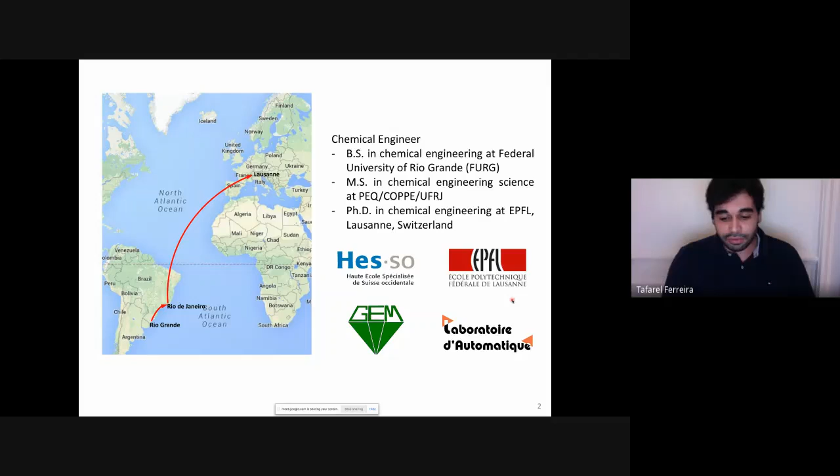EPFL is indeed a very nice place to work and do research.

Moving on directly to the presentation, I'm going to speak now a little bit about RTO. I'm going to try to explain to you what it is and how we do it.

So real-time optimization is a family of techniques where we use measurements in order to enhance the performance of the plant. By plant, I mean any kind of system that we aim at optimizing or improving the performance. Usually the plants are under disturbances, for example when the system has any kind of degradation, so the operating point changes over time, or because of noise, and also in presence of plant-model mismatch, which is basically the difference between the actual measurement and the model of the system.

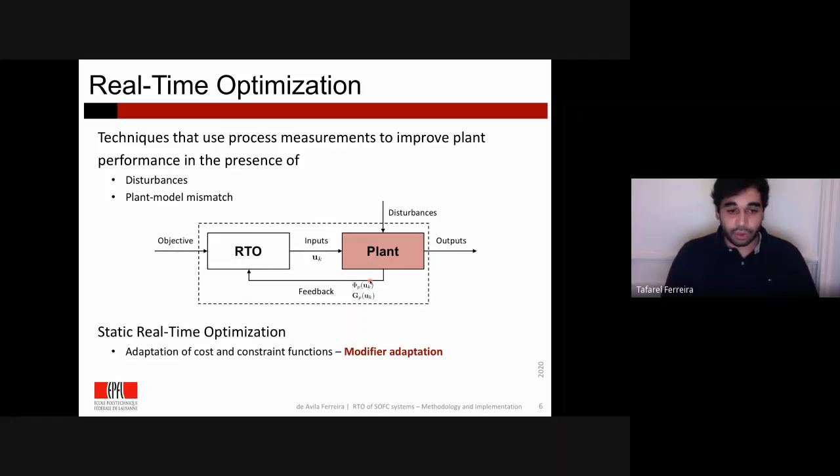So with these measurements, or with these entities computed, we feed back into the RTO block, and then we solve this problem iteratively until convergence. One of the most recently used RTO techniques is modifier adaptation, which adapts or modifies the cost and constraint functions. So how does it work? How does RTO really work?

So basically, as I said, we have the plant that we can write mathematically as the optimization problem, as you can see in this red block. And we have a model, which is an uncertain model, which doesn't really represent perfectly how the plant actually is. So just imagine if you had a perfect model, which we don't have, but if you did, and you were able to solve it, the solution of this optimization problem would be definitely different from this other optimization problem of the uncertain model.

It's important to mention as well that if we had a very good model, we wouldn't be able to use it in the RTO scheme. Why? Because usually good models tend to be slow and very computationally expensive. Therefore, we tend to use the best model that is available, the best model that is suitable for optimization, but that's not the focus.

So just imagine if you solve the optimization of the model, the gray block, and then input it into the plant, it would most probably lead to a suboptimal condition. It wouldn't be the optimal of the plant, because it would actually only be the optimal of the model. And it could even be worse, it could lead to an infeasible solution, which could be quite dangerous.

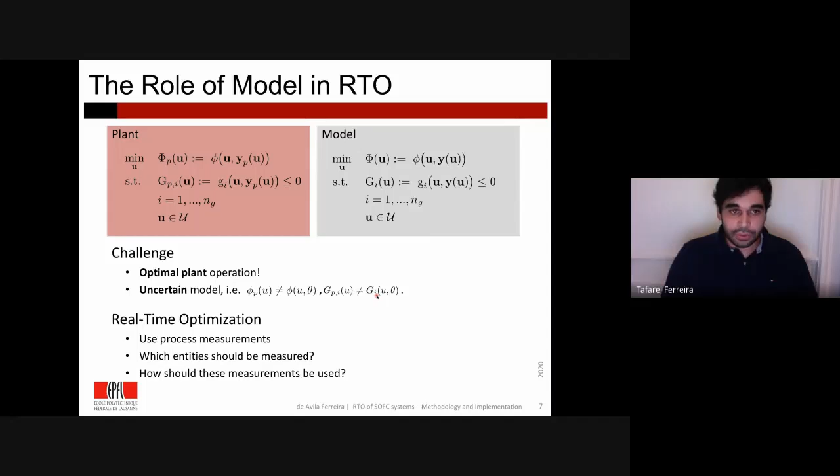So the challenge, or what we aim at, is reaching optimal operation of the plant using this uncertain model. But the question we raise here is how we do that, and the answer is by using the process measurements. But which measurements should we use, and how should we use these measurements?

One of the possible answers to these questions is the use of a modifier adaptation technique called constraint adaptation, where we use bias corrections of the constraint functions. So here we have a nice graphical representation. Here you can see in black the constraint of the model, and the constraint of the plant is in red.

Just notice that the red curve here actually doesn't exist. We are not able to have this red curve perfectly continuous as a continuous function, because we don't have a perfect representation of the plant. So what we do actually is shift this model constraint into where the plant is, by adding this bias term that here is expressed by epsilon g.

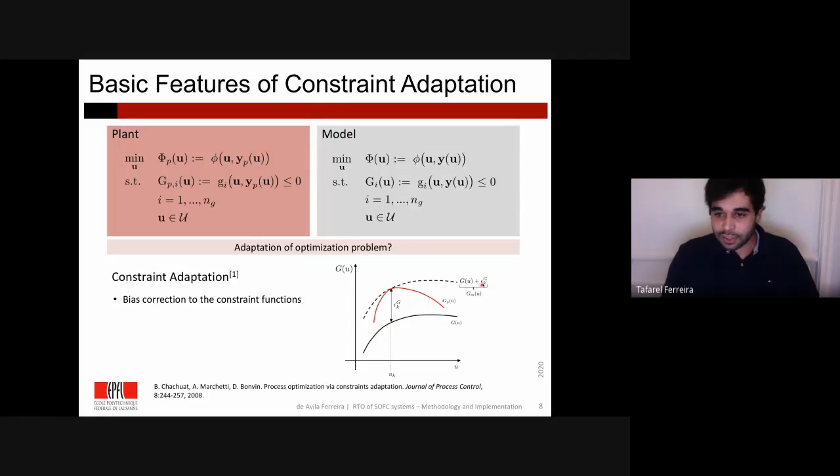So how does it work, basically? We solve this optimization problem here, where we add these bias terms to H and G. H represents the equality constraints, and G represents the inequality constraints, and these epsilons are computed by the difference between the plant measurements for both equality and inequality constraints, compared for the same operating point for the model.

Once you solve this problem, you will obtain the optimal solution, the optimal input that you may filter or not, and then you apply it to the plant. You wait until the plant reaches steady state, and you compare it with the counterparts of the model, or in other words, for the equality and inequality constraints of the model evaluated with the same inputs, the optimal inputs that came from the optimization problem.

Once we have this, we compare them, we subtract the model entities from the plant entities, and we input into the optimization block and solve this scheme until convergence. One advantage of using this is that if the optimum is determined by active constraints, which I will show you for the case we want to apply, it works very well, and it can be proven that we reach the KKT conditions of the plant.

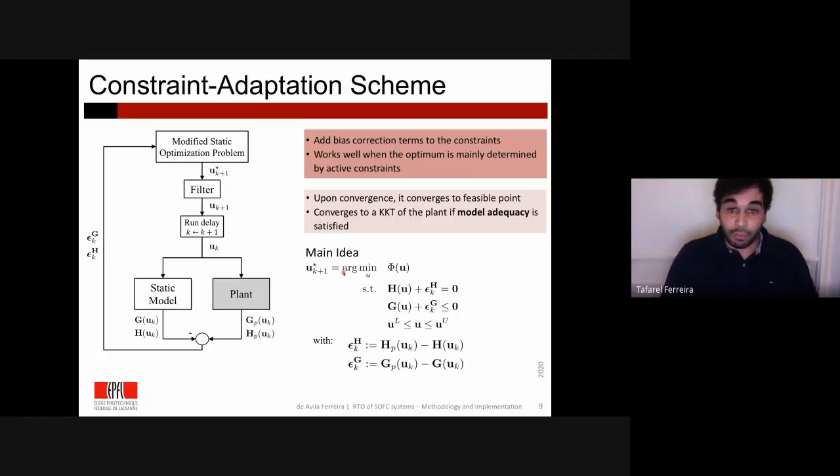For that, we have some model adequacies that I'm going to show in the next slide. So the model adequacy for the model basically says that we have two kinds of constraints: the constraints that are active and the constraints that are not active when evaluated at the optimum of the plant should be in a feasible region.

And also this other equation here basically says that the gradient of the plant should be, of course, in an opposite direction, equal to the linear combination of the gradients of the constraints, as you can see here graphically.

In other words, explained more simply, it just means that the optimum of the plant, the real optimum of the plant, should be in this quadrant. That's actually what this equation says. So if it's in this quadrant, behind the intersection of the active constraints, then it's guaranteed that this model is adequate, and therefore we are going to reach the optimal solution and satisfy the KKT conditions for the plant.

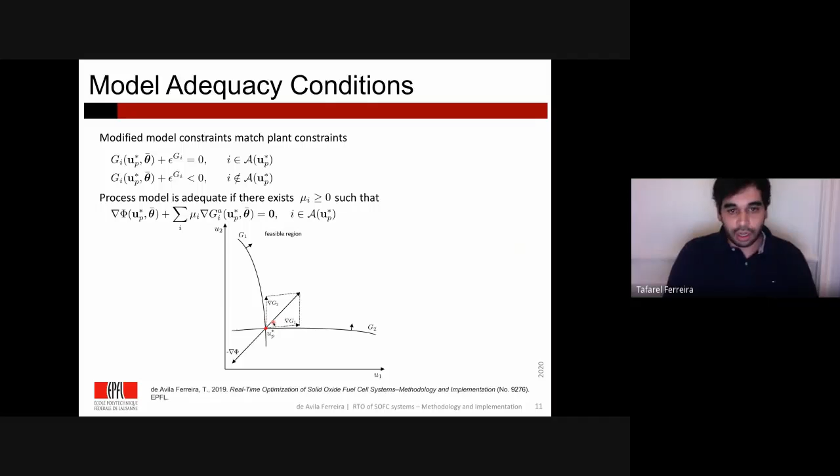But one of the problems of this scheme is that, as I said previously, we have to wait for the plant to reach steady state. This is a problem mainly for solid oxide fuel cell systems, or SOFC systems, because it may take one to two hours to reach a steady state. So just imagine that every time you need to apply a set of inputs, you have to wait until it reaches steady state, and then you change, and then you change again.

And it can be even worse. It could be that you apply the set of inputs, you go to an infeasible region, you have to wait until it reaches steady state, and then it can be too late, and then you have to apply a new input in order to go out of this infeasible region.

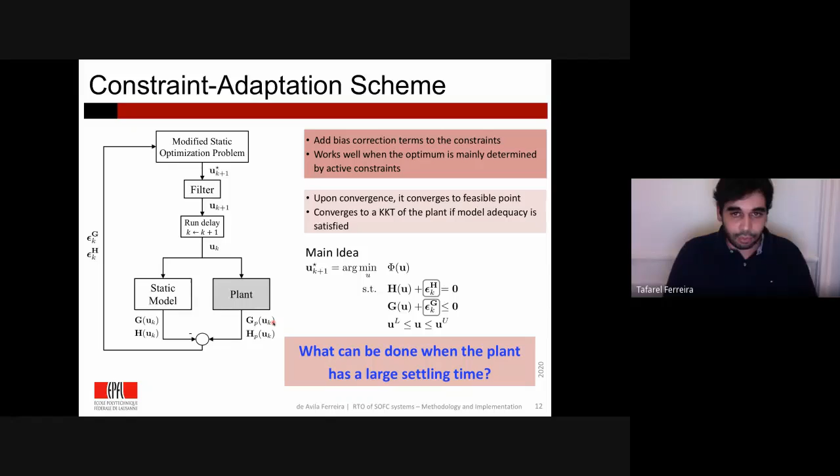So the question here is, what can we do in the case when the plant has a very large settling time? One possible answer is fast real-time optimization. That is one of the techniques we proposed during my PhD, where instead of using a steady state model and steady state measurements, we use transient measurements of the plant. So we perform each iteration without waiting for the plant to reach steady state, and we use a dynamic model.

However, what we use in the optimization block is still a static optimization. And this is the catch, because a static optimization is much simpler to solve than a dynamic one. A static optimization problem is much simpler to solve than a dynamic optimization problem.

So here, basically, the only difference is we still have these epsilon terms for the equality and inequality constraints, but here we compare the transient measurements of the plant with the transient counterpart of the model. This is done by using a dynamic model that we have.

By dynamic model, it basically means that we have the time derivatives representing the plant, but we don't have a model that is discretized and really represents the system spatially—that's important to mention. It's a simpler model, and the focus here is to use the measurement to ensure that the plant is going to reach the optimum, not to focus on the modeling part.

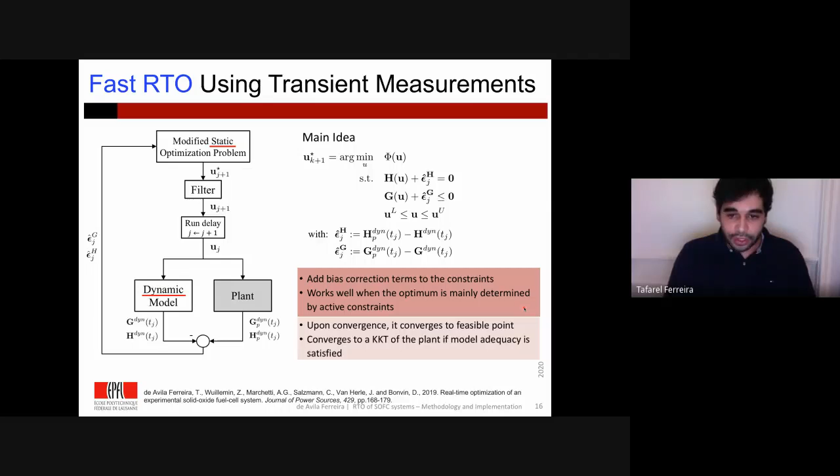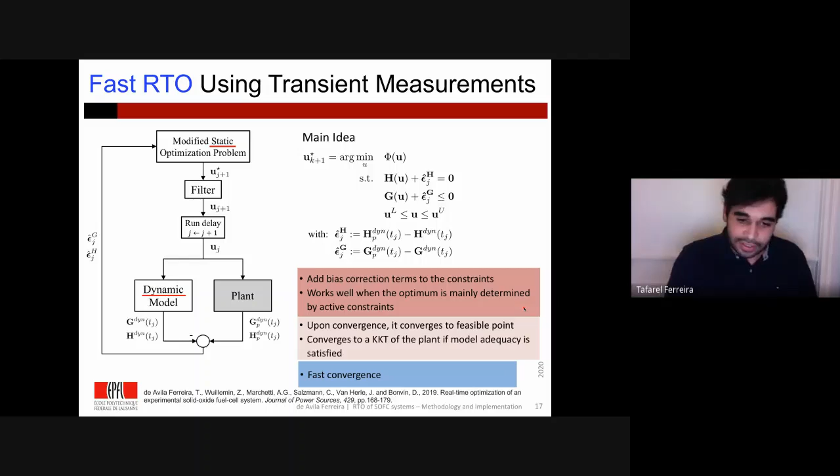So it possesses the same kind of advantages, as I said, like we just use bias corrections. If the optimum is determined by active constraints, it works very well. And upon convergence, it guarantees that we reach a feasible point. We also have the same KKT conditions if the model adequacy is satisfied. However, we have one additional feature, which is fast convergence, compared to the previous method where we have to wait for the plant to reach steady state.

So here, I would like to show you the SOFC system that we are going to use to optimize.

So the SOFC system consists of the SOFC stack, which is the heart of this system, an afterburner that is used to burn the fuel that is not used inside of the stack, and a pre-reformer.

Okay, maybe I should go the other way around. We have the fuel, steam, and air. With these three things, we input into the pre-reformer. In the pre-reformer, we convert the fuel, which is the methane in this case, into hydrogen, because of the reaction with the steam here inside of the pre-reformer.

So when we have this combination of a gas that's called syngas, which is mostly hydrogen, we input into the stack, and then here the hydrogen in the anode reacts with the air in the cathode, in the membrane that's inside of this device. When this reaction takes place, we generate electricity.

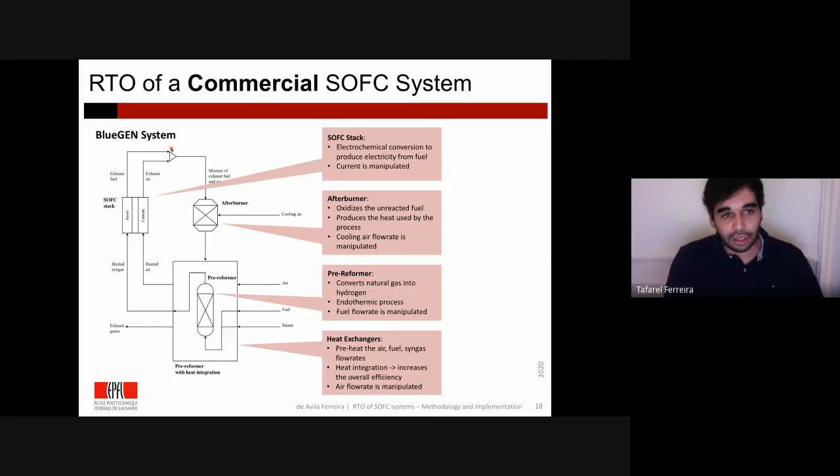It's a P&ID of the BlueGEN system, a commercial system produced by Solid Power, which is an Italian company that sells these devices.

Here, more specifically for the fuel cell stack, we can see how the thing works. So basically, the fuel enters by one chamber and the air enters into the other chamber. The oxygen goes through the membrane where the reaction takes place. When this reaction takes place, electrons are liberated, and here we have a resistor.

This resistor - we can control the size of the resistor, therefore the resistance. In other words, we are controlling the electric current. By controlling the electric current, you are controlling the conversion of this reaction, which is quite interesting. So when you control the conversion of this reaction, we are actually controlling the power that we can deliver.

So in some cases, as these devices are produced aimed for small business and houses, for example, to produce electricity, we can adjust this resistor or the electrical current in order to produce the energy that's required for the house. So we have sometimes a peak of energy where we need more, and also periods where we don't need much energy.

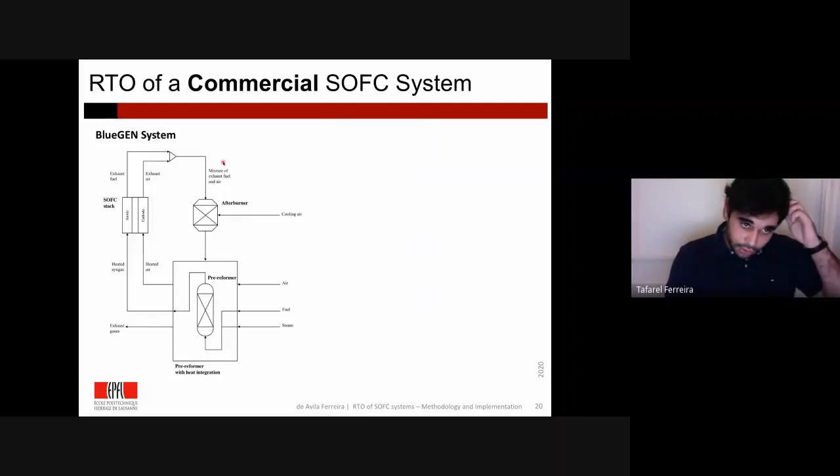So as I said, this is a system produced by Solid Power, but actually they don't use any kind of advanced controller. They only use PID. So we had to use RTO to really optimize their system.

And we had 4 inputs that we used to optimize, which are the current, the fuel flow rate, the air flow rate, and the cooling air flow rate, that you can see here in the P&ID in red.

And in blue are the measurements, the only measurements that we have to use in the RTO scheme in order to control it, which are the outlet temperature of the cathode, the inlet cathode temperature, the burner temperature, and also the cell voltage.

And then Solid Power gave us some operational constraints for the cell voltage, for the fuel utilization, which is how much the fuel is being used by the SOFC stack, the air excess ratio, which is a ratio between the stoichiometric air that we need and the air that we input into the system, the temperatures that I just mentioned, and also the upper and lower bounds for the inputs, as you can see here.

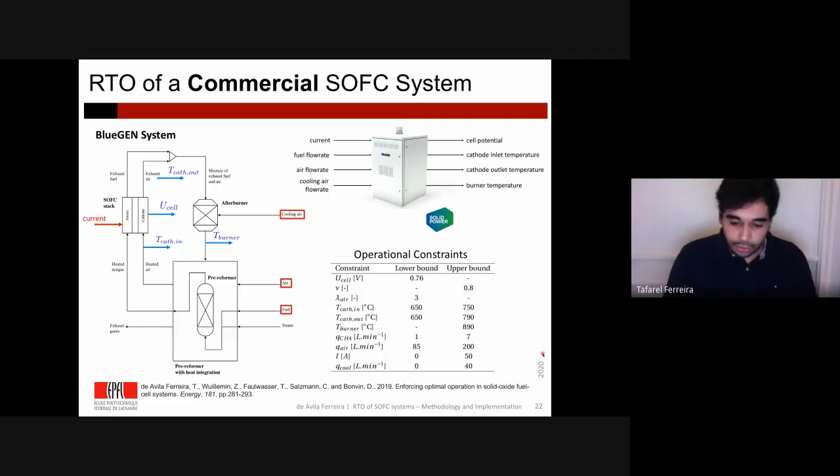So once we have this, we formulated the optimization problem where we aimed at maximizing the efficiency, the electrical efficiency, as you can see here.

And then we have these other terms for the cooling air and the air that we input into the system, that are there only to ensure that we are going to use the minimum amount of air that's allowed.

We solve this optimization problem with these operational constraints, and we have one additional constraint, which is an equality constraint, that's on the electrical power.

Basically, this is just set by the user a priori before we start the optimization routine. And then the objective is to maximize this efficiency for this particular electrical power that is set while respecting all these operational constraints.

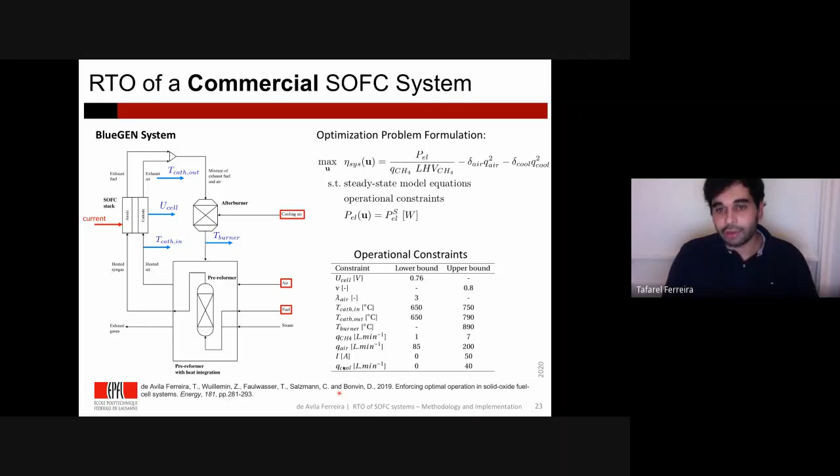Here I'm going to show you two experiments. One we call slow RTO, that's the first part that I presented, when we wait for the steady state to take measurements. Here we wait 90 minutes, which is basically the RTO period. Then we have the fast RTO, where we wait only 5 minutes, meaning the system is always in transient.

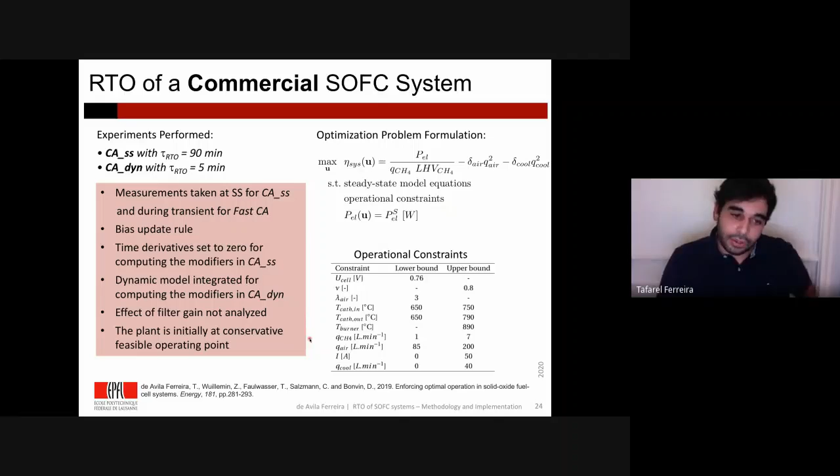We are going to do the bias rule, because it's inherent to the constraint adaptation. For the steady state case, we set the time derivatives used to compute the epsilons to 0, and for that we integrate them to solve the dynamic model. We are not going to evaluate the filter gain; instead we set it to a fixed value, and we start the experiments from a conservative point.

We set this parameter, KF, to 0.4, meaning we move 40% of the way toward the result that the optimization problem gives, with respect to where the system currently is operating. Then, as I said, we have these two RTO periods, and we solve this optimization block here.

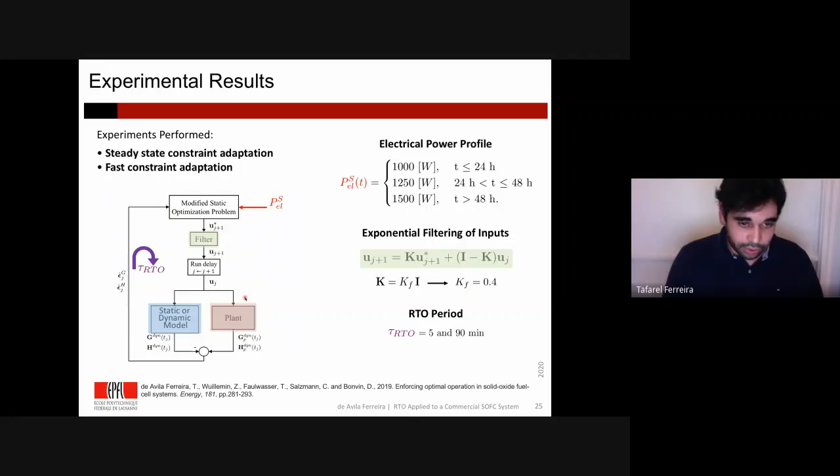So first, aiming at 1 kilowatt, we start from the very conservative point that solid power gave us, which is 1 kilowatt at 55% efficiency, then we apply RTO and see what happens. Here is the first set of results.

We also see that it takes up to 6 hours to reach the electrical power when we change the set point, and the reason is because of the filter we chose. We wanted to be conservative, to ensure that we wouldn't break the system or violate any constraints. But this is just a matter of tuning the parameters.

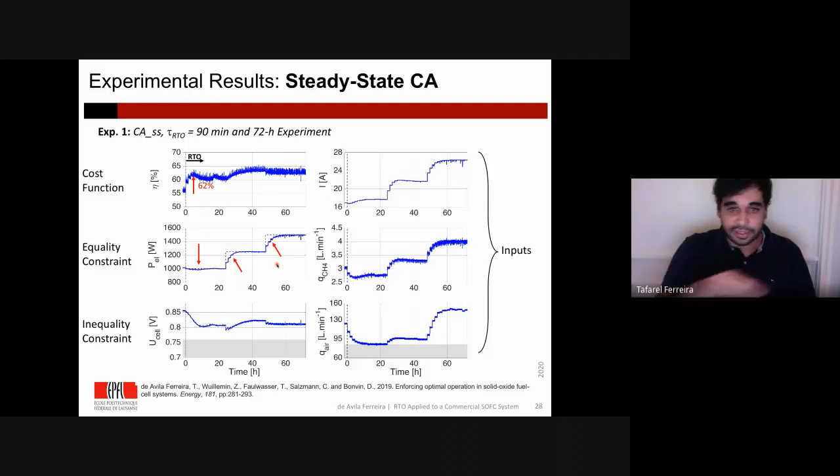We can see that for the first part of the experiment, when the electrical power is at 1 kilowatt, the air flow rate variable is at its lower bound, so it's considered one active constraint. This equality constraint is also considered an active constraint. So we have two, plus the cooling air flow rate that is also at its lower bound. Additionally, we have the inlet cathode temperature at its lower bound too. So we always have constraints active.

So for this specific SOFC system, we see that we have 4 constraints active, and we have 4 degrees of freedom, 4 optimization variables. So we can say that this constraint adaptation technique is quite suitable for this kind of system.

We also see that for this BlueGEN system, as it's called, it takes from 16 to 20 hours to actually settle to the steady state. This is one thing we should say: this is not suitable for industry. They are not interested in an approach that takes so long to reach a steady state, which is the optimum of the system.

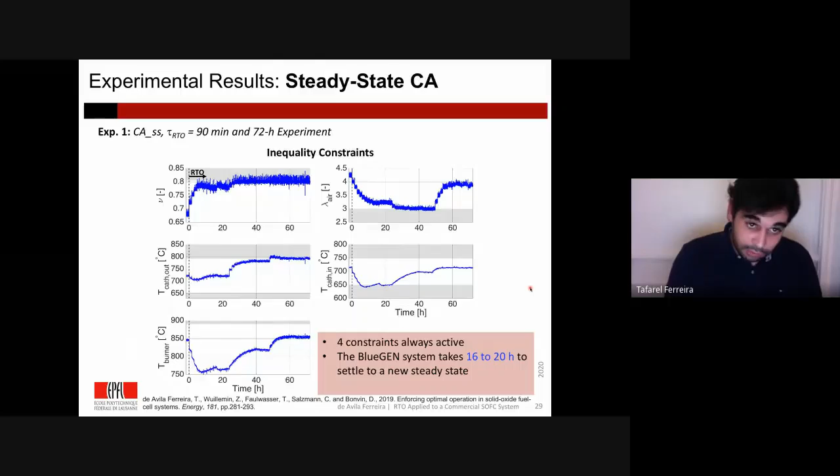So we applied the fast RTO, where the RTO period is 5 minutes. Here, we didn't see the need to do a 72 hour experiment because it was much faster.

So we reduced it to 6 hours. We apply the same filter equal to 0.4, and we have practically the same profile. The only difference is that we change the electrical power every 2 hours. Repeating, we use a dynamic model and transient measurement, and we start from the same conservative point at 1 kilowatt and 55% efficiency.

If we had chosen, for example, a filter value equal to 0.6 or 0.8, it would be much easier and much faster to reach this equality constraint.

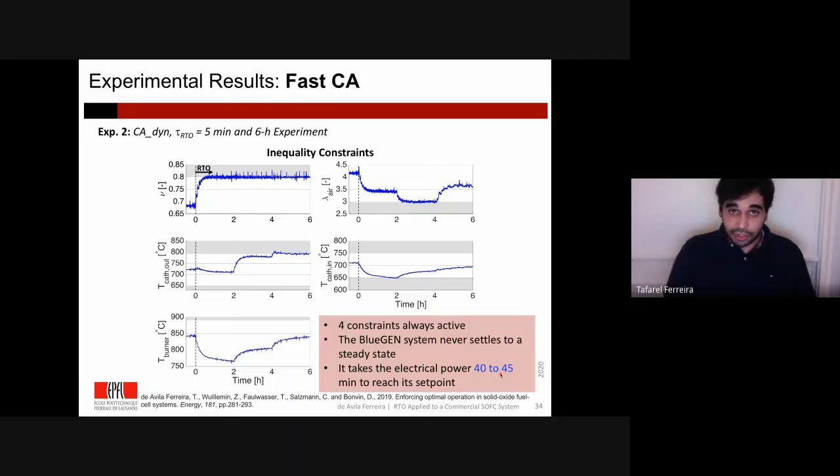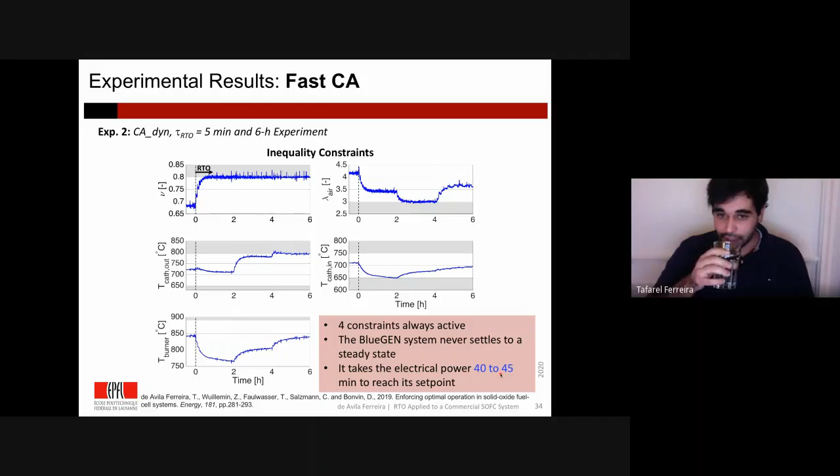Interesting enough, we have again 4 constraints active. The one very interesting thing is that although we use a static optimization block to solve this, the system never actually settles to a steady state. As you can see here for the temperature profiles, they are always moving, but instead of taking such long time as 16-20 hours to reach steady state, with this proposed method we take 40 to 45 minutes to reach the set point of the electrical power, which is a significant advance for these kinds of approaches for solid oxide fuel cells.

Okay, so now I'm going to show another thing that I did when I was doing my postdoc at the GEM group of energy materials, where we used basically a machine learning approach. We use Gaussian process and incorporated it in the RTO block, combined with RTO, in order to solve the optimization and find optimal operation for SOFC systems.

So here, instead of the BlueGen, we have a smaller system. Instead of producing 1 to 1.5 kilowatts, it produces only 100 to 130 watts, so it's a much smaller system. Before we had the burner that helped keep the temperature up; here we don't have the burner. Here we have only electrical heaters that help reach the desired temperature, as well as the pre-reformer, in order for the reactions that enable the conversion of methane into hydrogen to take place.

And we have as well the fuel cell stack here. So in blue, you see the inputs or the optimization variables, the ones that we use to manipulate the system. And in red, we have the measurements: the temperature of the anode, the temperature of the cathode that goes out of the stack, the cell voltage, and the temperature of the air after the electrical heater.

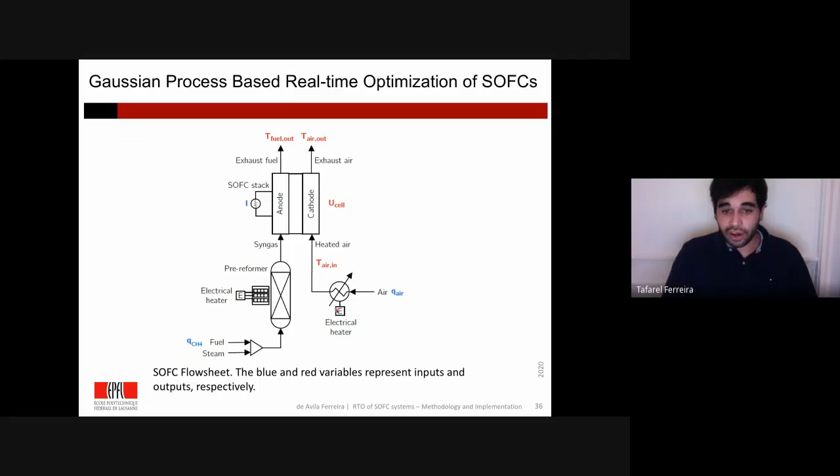So basically, we have a very similar optimization problem with different values of upper and lower bound, because it's a much smaller system, and we have one less optimization variable. Here it's formulated exactly the same way as before: you want to maximize the efficiency, reduce the amount of air that you use. We have an equality constraint, upper and lower bounds on the inputs, and then the other operating constraints on temperature, cell voltage, fuel utilization, and air excess ratio.

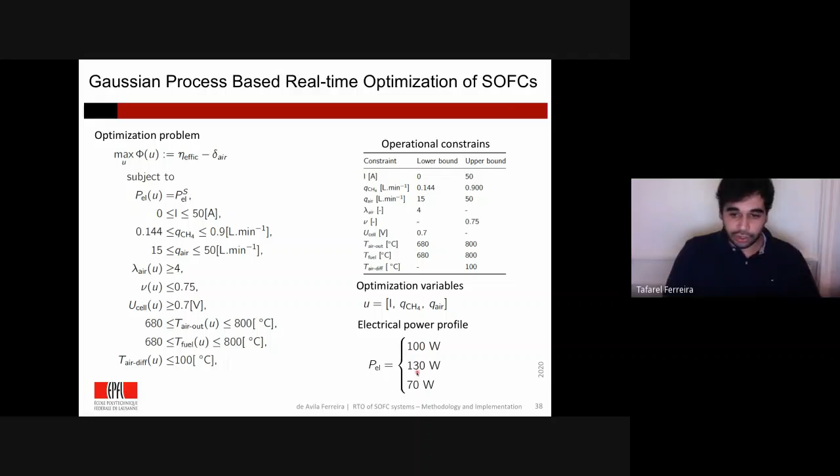Okay, here we also change the power in order to just check the performance of this approach. So we go from 100 to 130 and 70 watts because the system is much smaller.

Okay, so before I go into how we formulated this Gaussian process based RTO, I think I should just give a few words about modifier adaptation. Before, I presented constraint adaptation, which is a simpler version of modifier adaptation.

So here, basically, what we do is we have some terms which are the zeroth and first order terms of a Taylor series expansion for the objective function and constraint function. And then we just have to compute these lambda terms for the objective and constraint functions, and these epsilon terms that are represented here below.

So basically these terms are the difference between the plant constraints and the constraints of the model. And also we have the derivative with respect to the inputs. And then we just subtract the plant entities from the model entities for both the constraint and objective function.

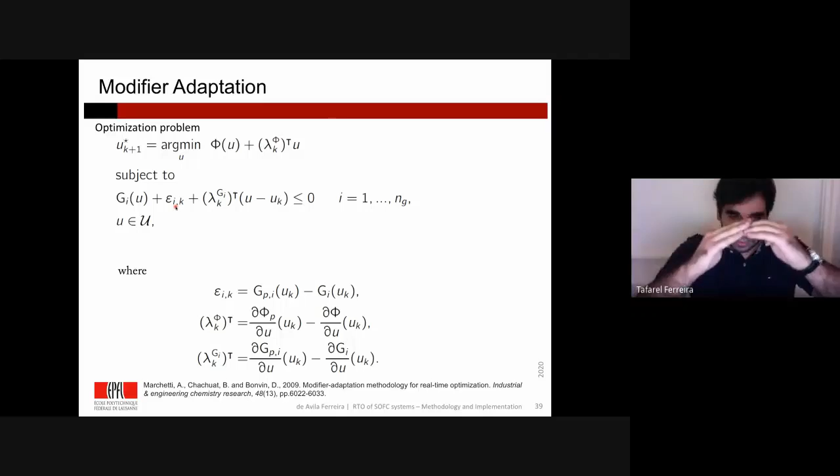So when you do that, basically what you do is you shift the function. As you can see here, you shift the model function to where the plant is, where the measurement is. This is evaluated at the current point. And then you also change the slope of the function.

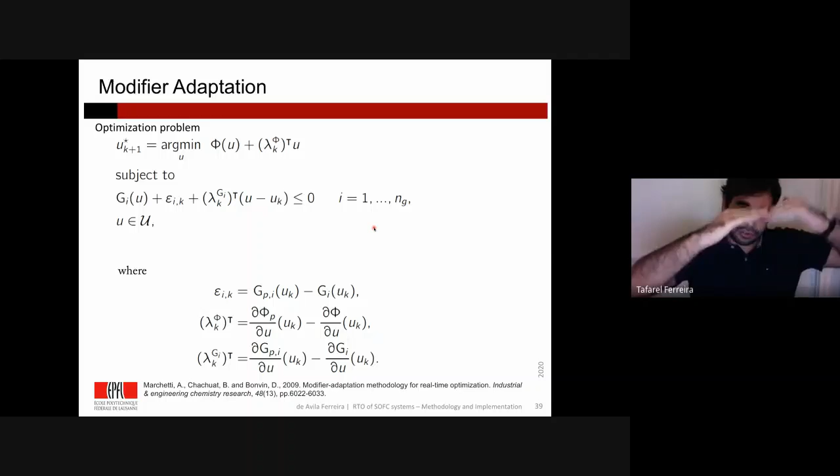So what we do basically is evaluate the derivative of the plant at the current point, and then we correct this in the model. We shift the model and correct the slope of this function, so that the model at this specific point gets more similar to the plant.

However, one major drawback of this technique is the fact that we have to compute these gradients. So how do we compute these gradients of the plant? We usually do finite differences. Can you imagine doing finite differences for a SOFC system where you have to wait 90 minutes to reach steady state? What does it mean?

It means that if you have 4 inputs, you perturb one input, you wait 90 minutes to reach the steady state, then you perturb the second, 90 minutes more, the third and the fourth, always waiting 90 minutes to reach the steady state. And after that, you are able to compute only one term, only one term, which is the gradient of the plant.

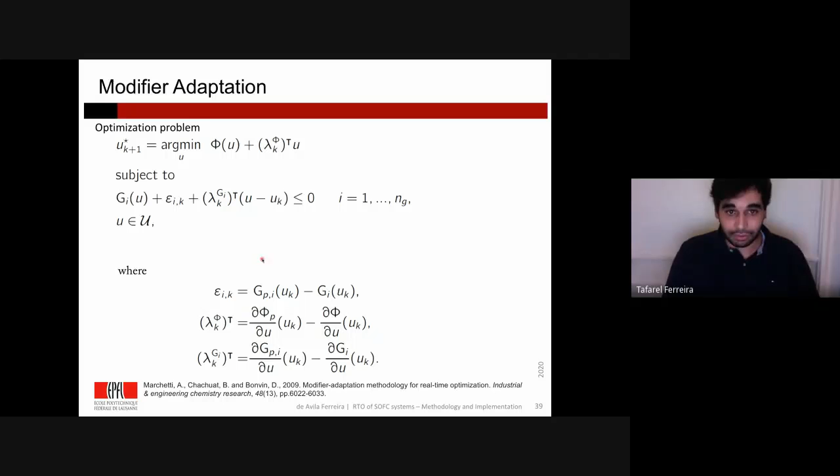And then you do this correction, and then you go to the next iteration and perform exactly the same thing again. So due to this reason, we proposed a GP-based approach, a machine learning approach, where you use Gaussian processes to do regression.

So by doing that, we don't need to do the finite differences, the perturbations in the plant, and then we obtain much more information about the surrounding of the operating point where we actually are. In other words, you obtain more information and you are faster. So that's a quite good advantage of this approach that we proposed.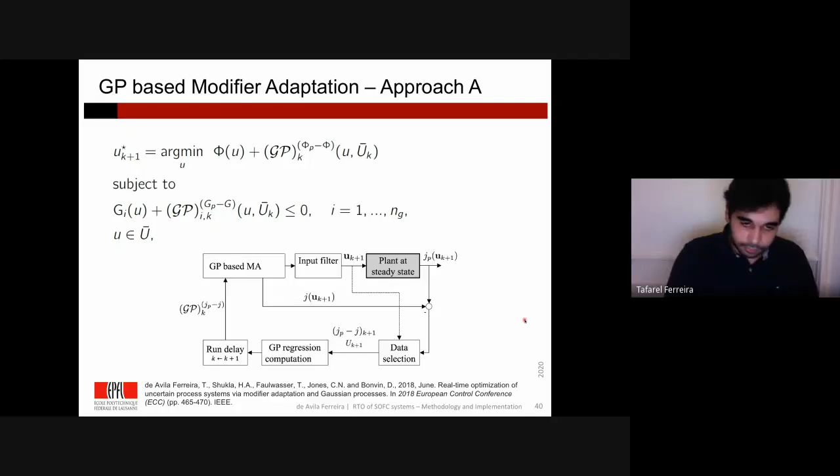Another approach, which I call approach B, is that we compute the GP of these epsilons and also lambda, using only the available measurements that we have.

We don't have to actually perturb the plant, we perturb the GP, but this is done offline because you only have the measurements, and in the end you end up with a GP model. Then once we compute this epsilon, we introduce it here in the modifier adaptation approach.

So this is another way of computing these modifier terms, and we have another GP approach to show and compare the differences.

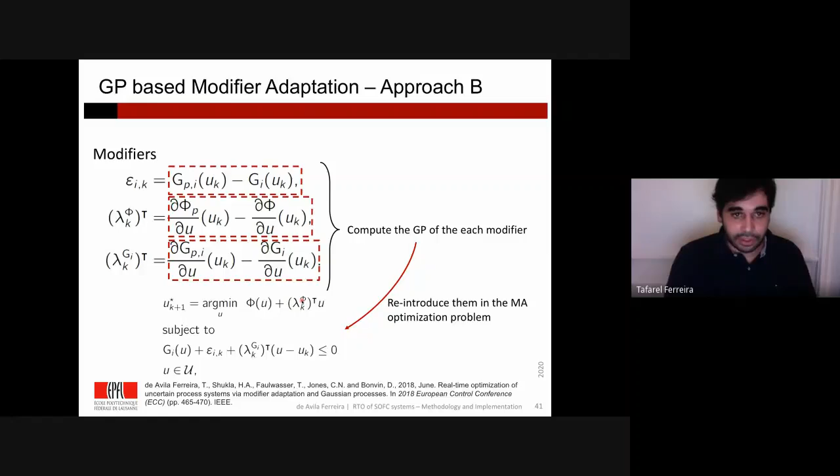For this specific system, we used 12 data points. Here are basically the inputs, and here are the outputs, or the variables that we compute based on the outputs.

Here we have the last point, which is the optimum of the model applied to the plant at 100 watts. You can see clearly that when you apply these 100 watts, that optimum of the model, to the plant, we don't obtain the power that we wanted. So here we can see clearly the mismatch that we have.

Additionally, we computed the plant model mismatch for the measurements, for variables like cell voltage and temperatures. You can see that for the cell voltage, the highest value is 0.13, which is the difference between plant and model, representing up to 20% with respect to its nominal value of 0.7. In other words, we have a significant plant model mismatch.

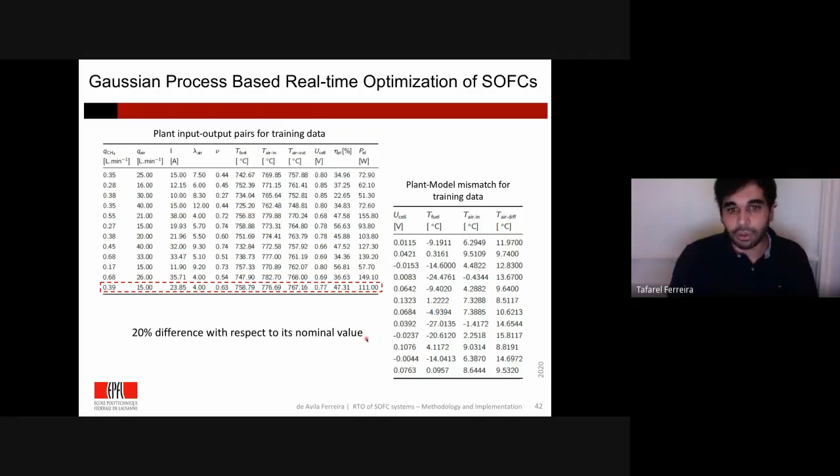I think I'm a little bit short on time, so here are the other variables. As you can see, the cell voltage is quite noisy, but even so, we don't have violation of constraints. These are just because of the noise.

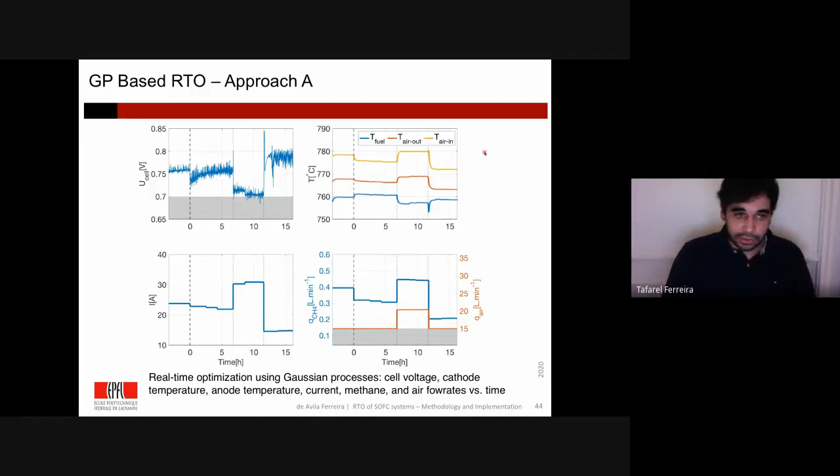Here is the profile of the temperature, and here are the inputs, as you can see—in other words, the variables that were changed in order to obtain the performance that you saw on these slides. For the second approach, we can see that...

We only have a change from two powers. We go from 100 to 70, and the reason is basically because we did one experiment very far apart from the other, and when we performed the second experiment, the fuel cell was quite degraded, so it was not anymore the same system.

But as I said, compared with the first approach, this second approach only computes locally the value of lambdas and epsilons. So the GP approach, the machine learning approach, has the need to search in the input space in order to acquire more information from the plant.

That's why you see here a very big dip in the efficiency, but this is basically to search in the input space, and then after that, it goes back to high efficiency and restores the value of the power.

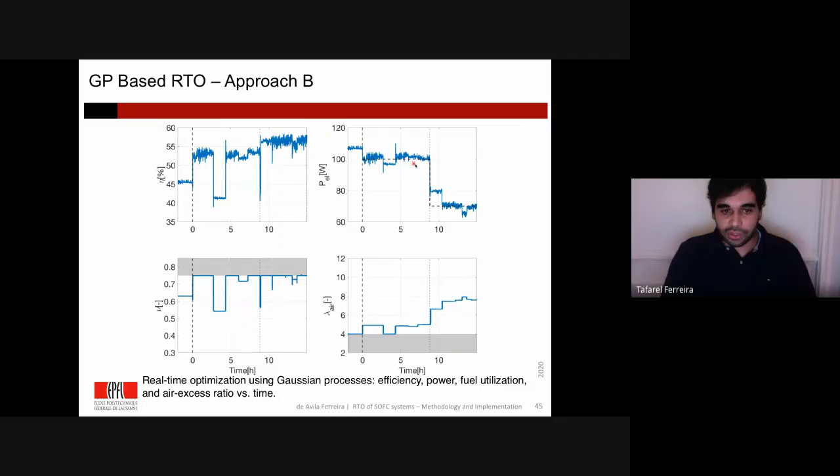Here we have as well the other set of results for approach B. And with that, I conclude my presentation.

The main conclusion of this presentation is that we proposed a methodology that ensures plant optimality despite the plant model mismatch. We use transient measurements that improve and increase the convergence speed of these kinds of approaches. By doing so, we found a different way of estimating these plant steady state values by using this fast RTO that we proposed.

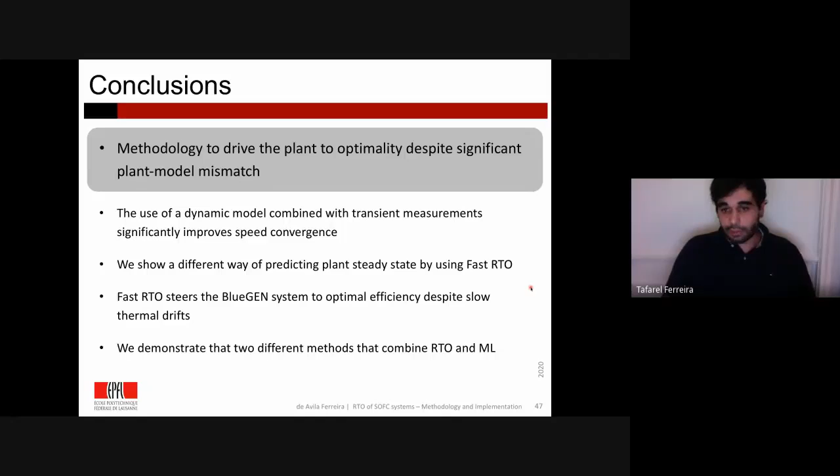Although the system never reached steady state—we have these slow thermal drifts, meaning the temperatures never settle to a steady state—we are able to reach very high efficiency, the optimal values for this particular system, while delivering the electrical power we aimed for.

Finally, we proposed two different methods that combine RTO and machine learning. Thank you for your attention, and if you have any questions, I would be pleased to answer.